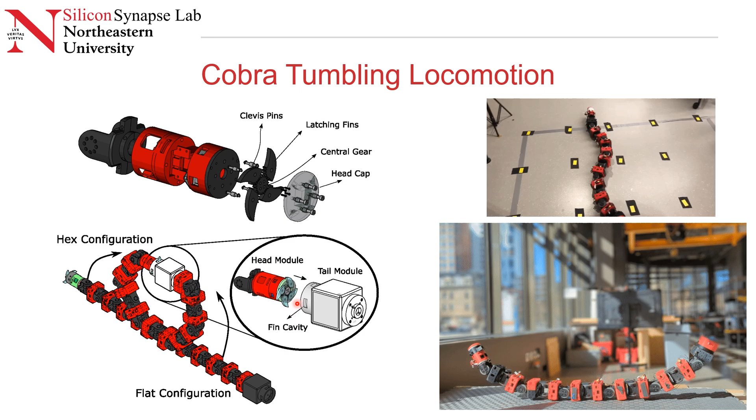And the purpose of doing this is that since it's able to hold the shape with very little energy, we can actually travel really large distances down slopes purely under the effect of gravity and use very little energy to do this locomotion.

So to enable this tumbling locomotion, we attached these outer casing on the robot, which partially protects the electronics of the robot, but also provides a large base, which provides lateral stability. And that has a twofold effect.

So in this top video, what you're going to see is COBRA starting on a 4-degree inclined slope and shifting its center of mass forward to initiate tumbling. And the attachments do provide lateral stability. So despite the fact that it wasn't able to start rolling, it did maintain its vertical orientation.

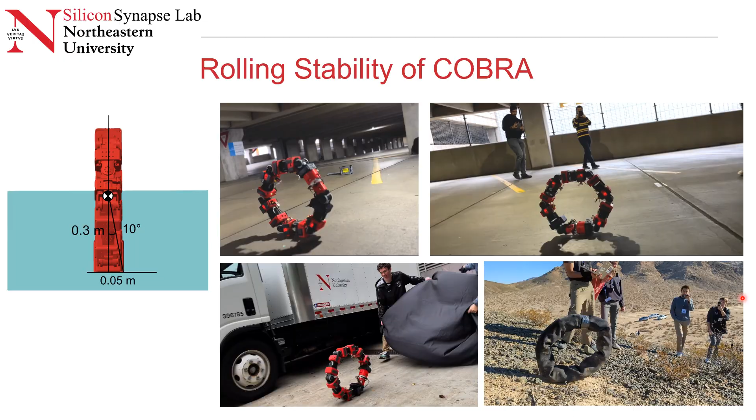And with a slightly larger push and a larger slope angle, COBRA is able to consistently roll down the slope and maintain its stability without falling over. And the reason this is important is that we are trying to perform this locomotion in environments shown here on the bottom right, where it's a very rugged outdoor kind of environment, and you have several obstacles such as these bushes and rocks, which can potentially topple the robot as it goes through the tumbling locomotion.

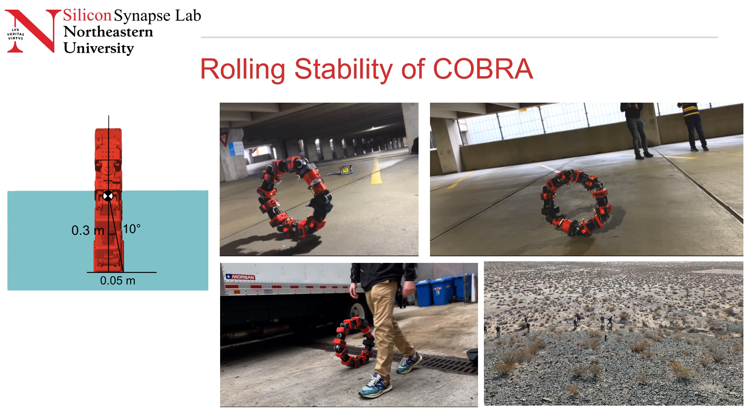So our eventual goal is to build a closed loop controller that can allow the robot to follow a desired path down the slope. And in order to do this, we need to understand the stability of the robot and how much of an external perturbation it can survive while still maintaining its rolling stability. So that is the purpose of this work.

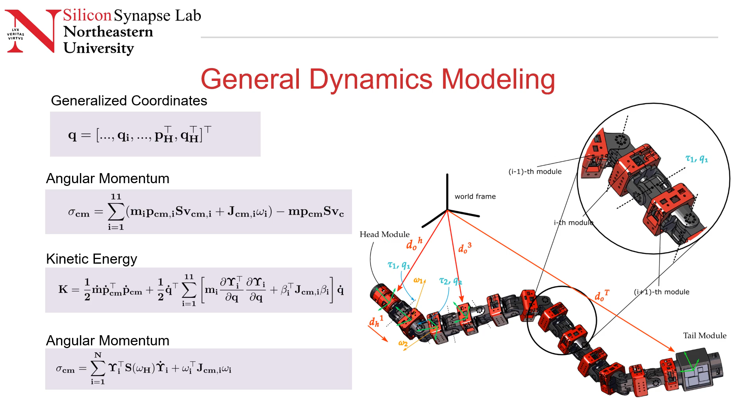And continuing on this, once the robot is in the tumbling configuration, we can define the kinematics of the tumbling structure to identify the position of the contact point with respect to the position of the head based on the joint angles and the orientation of the head, and define the kinetic energy as a function of the angular momentum of the robot. So what this lets us do is control the angular momentum through controlling the contact point, and that lets us define a desired path.

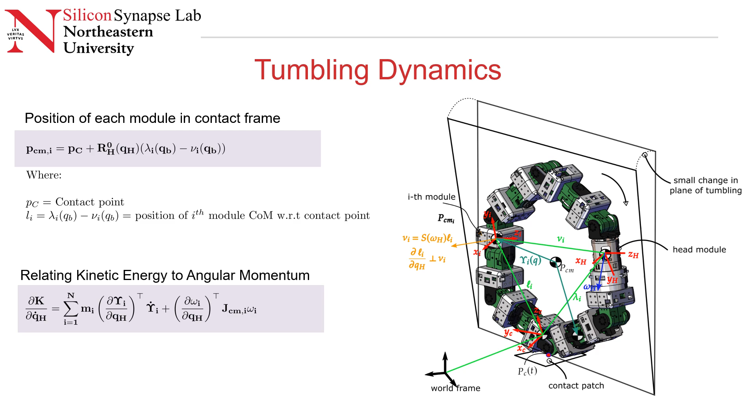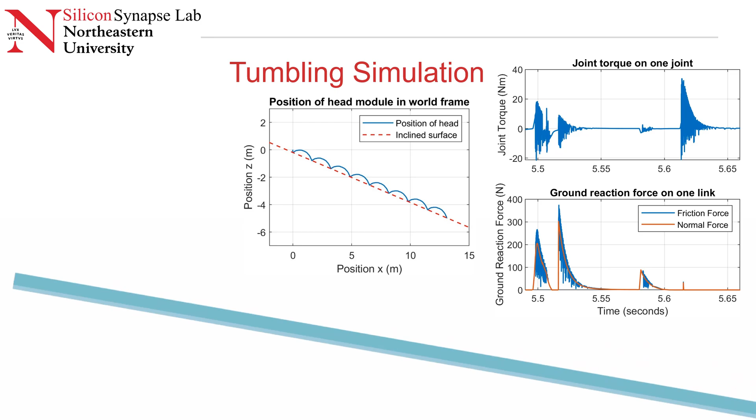So we use this test setup that lets us study the amount of force required to fully topple COBRA over. So this diagram shows the amount of change in angle it would take to make COBRA unstable. So it would have to tilt by an angle of over 10 degrees for the center of mass to go past this support structure on the ground.

And to test this, we connected COBRA to an imaginary fixed link in the air. And we gave it a spinning moment. So this is rotating at a fixed angular velocity of 2 revolutions per second. And we apply a small moment about the toppling axis over a period of 0.1 seconds. 0.1 seconds is about the contact time that it would take for one link to be in contact with the ground during the tumbling locomotion.

And what we see is that the torque required to effect a small 1 degree change in this axis, or the toppling axis of COBRA, is over 50 newtons. So what this gives us is a constraint on any future controller that would have to react to this external perturbation and remain stable.

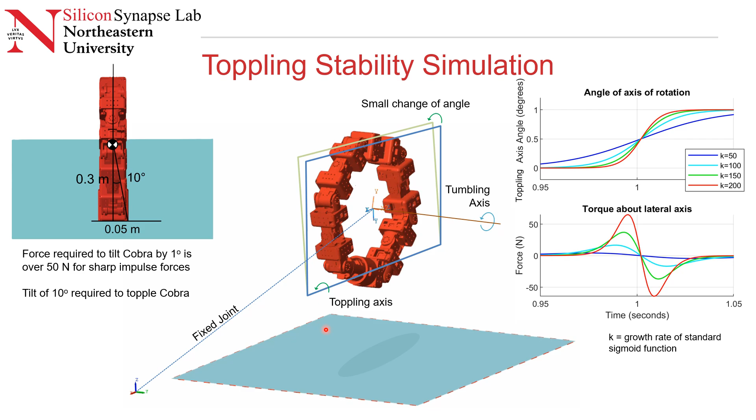We've demonstrated open loop tumbling for the very first time and developed a simulation to study the tumbling dynamics within which we can read all these data points which are inaccessible on the real robot. And additionally, we have built a modeling framework for tumbling dynamics and investigated the natural stability of this tumbling structure.

The next step will be to validate this dynamic model and build a control framework surrounding this that lets us steer the tumbling locomotion. And part of this will be to integrate onboard sensing to identify contact locations and estimate the ground reaction forces, and validate this by comparing it with those that we see in simulation.